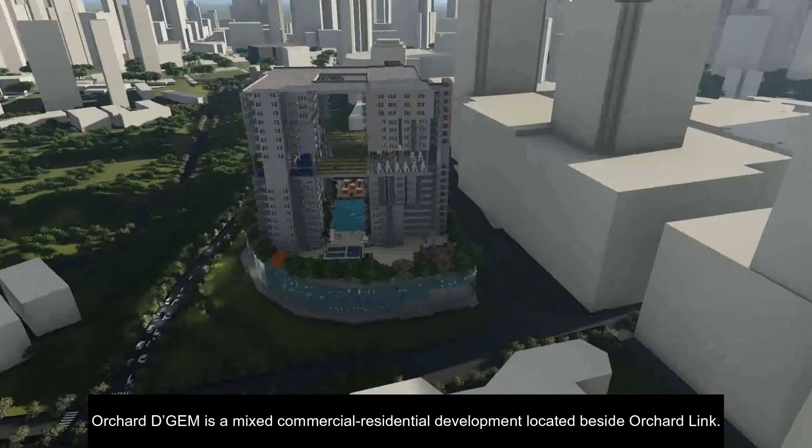Orchard D'GEM is a mixed commercial residential development located beside Orchard Link. The mall consists of 3 levels and 2 basements with 79 retail and F&B outlets.

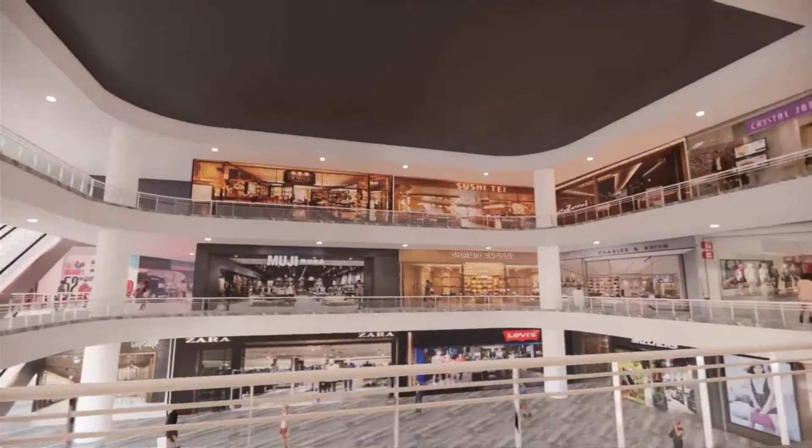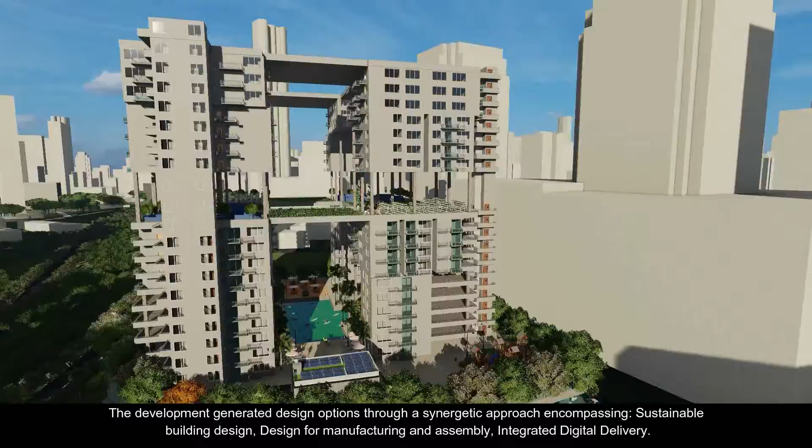The condominium, which is above the mall, has 4 18-story towers with 68 residential units, including a sky aquaponics for community use. The development generated design options through a synergetic approach encompassing sustainable building design, design for manufacturing and assembly, and integrated digital delivery. Orchard D'GEM is designed to be green and sustainable.

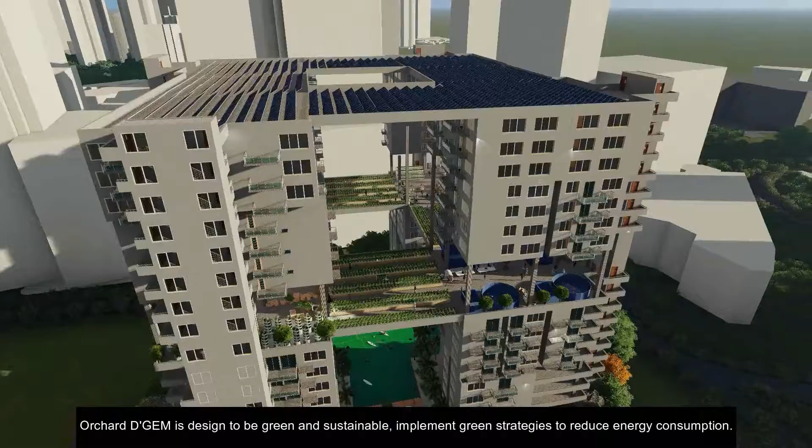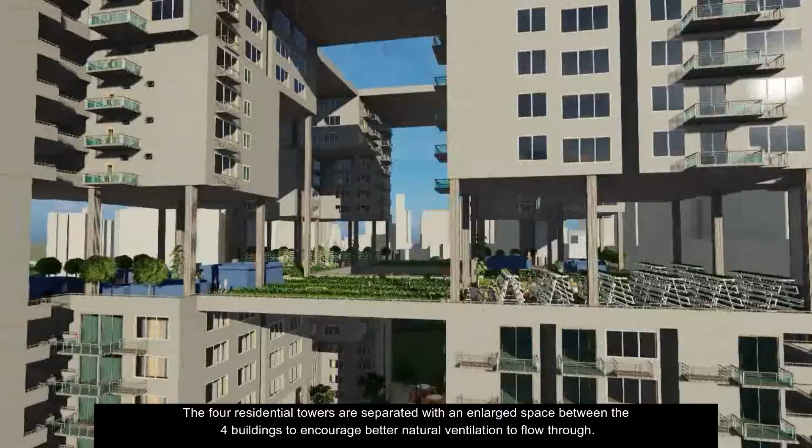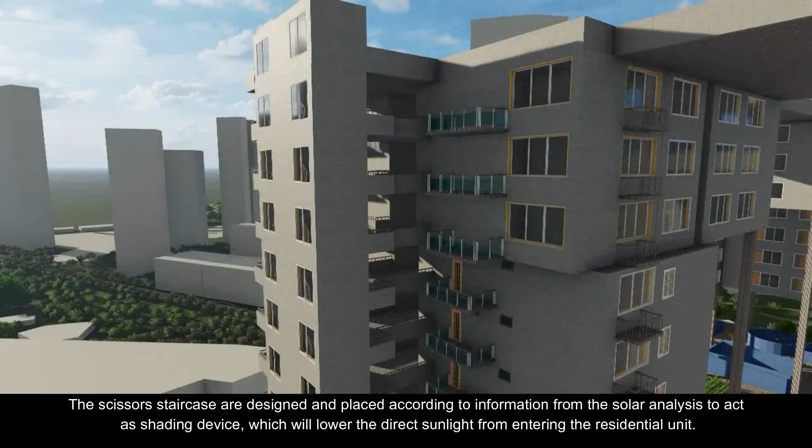The development has a total of 21 stories. The 4 residential towers are separated with an enlarged space between the 4 buildings to encourage better natural ventilation to flow through. The scissor staircases are designed and placed according to information from the solar analysis to act as shading devices, which will lower the direct sunlight from entering the residential units.

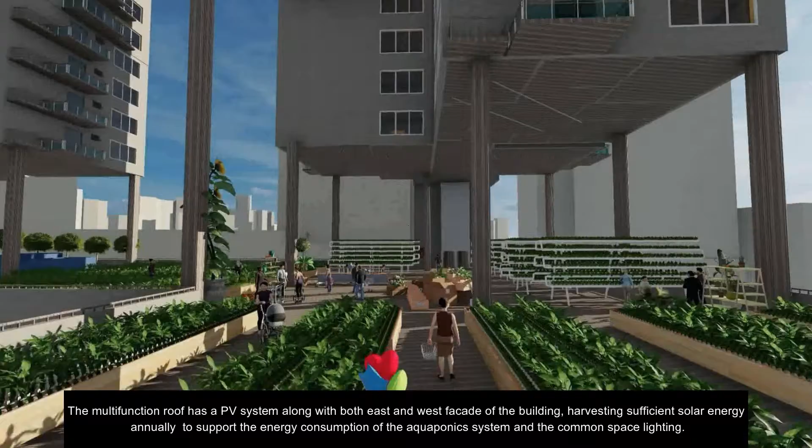The multifunction roof has a PV system along with both the east and west facades of the building, harvesting sufficient solar energy annually to support the energy consumption of the aquaponics system and the common space lighting. The multifunctional roof also consists of a rainwater harvesting system. The water is used for landscape irrigation and general cleaning of the building.

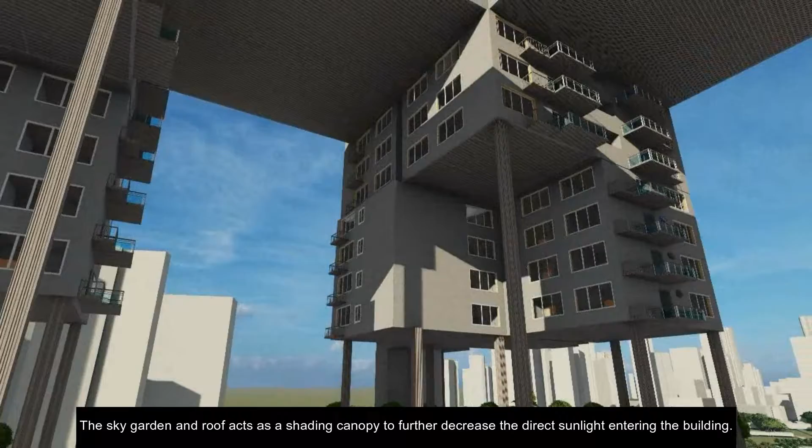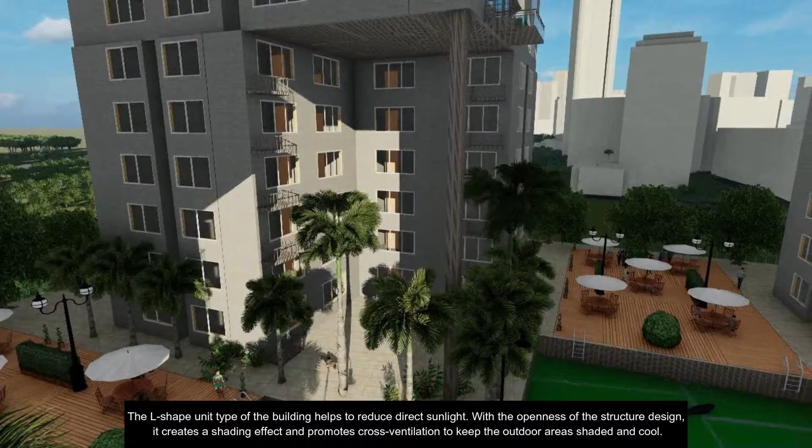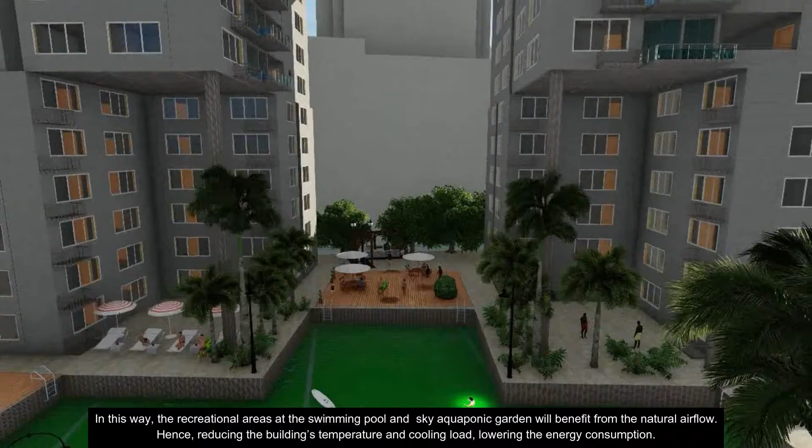The sky garden and roof act as a shading canopy to further decrease the direct sunlight entering the building. The L-shaped unit type of the building helps to reduce direct sunlight. With the openness of the structure design, it creates a shading effect and promotes cross-ventilation, keeping the outdoor areas shaded and cool. In this way, the recreational areas at the swimming pool and sky aquaponic garden will benefit from the natural airflow, hence reducing the building's temperature and cooling load, lowering the energy consumption.

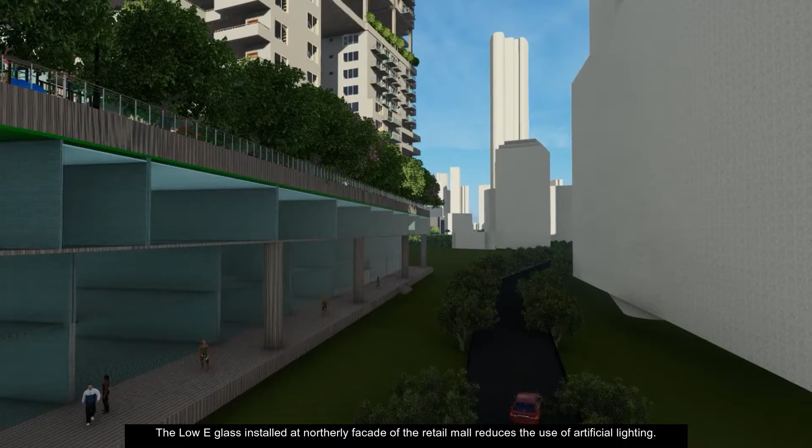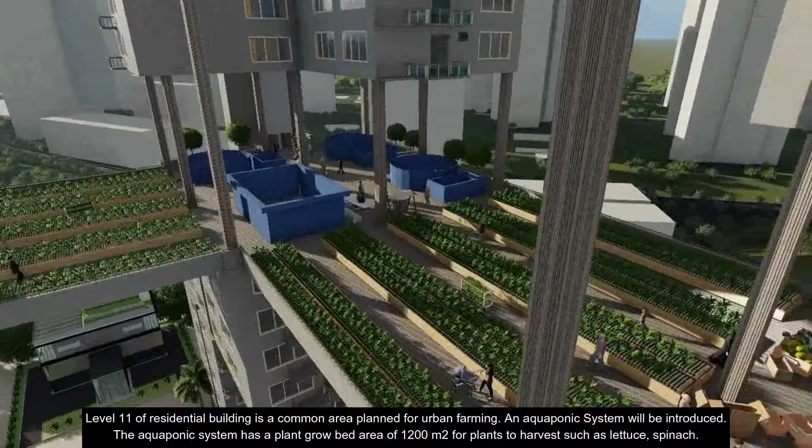The low-E glass installed at the northerly facade of the retail mall reduces the use of artificial lighting. Level 11 of the residential building is a common area planned for urban farming. An aquaponic system will be introduced. The aquaponic system has a growth bed area of 1,200 square meters for plants to harvest, such as lettuce and spinach, and 6 fish tanks with 6,028 kilograms of fish, such as tilapia.

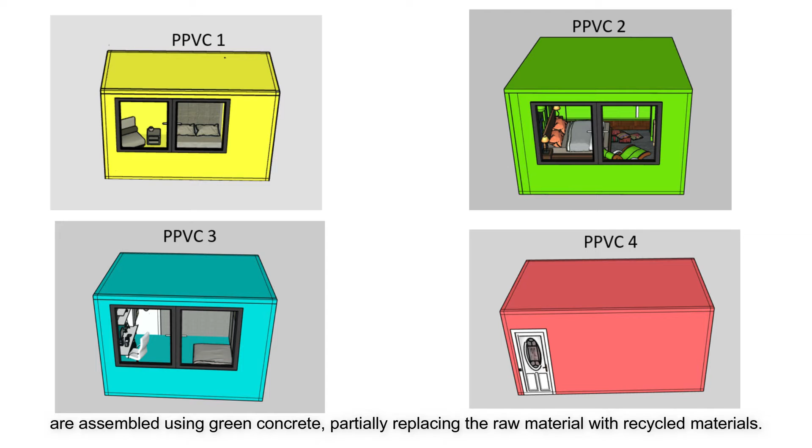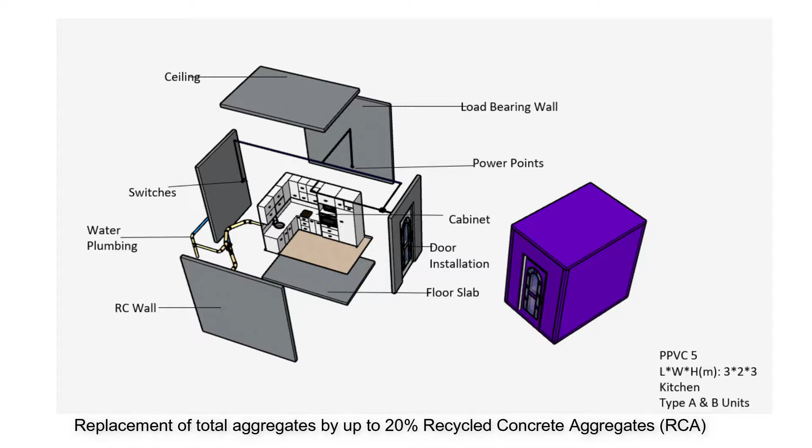Reinforced concrete PPVC modules are used to form the residential units, where the modules are assembled using green concrete, partially replacing the raw material with recycled materials: replacement of sand by up to 10% washed copper slag, replacement of total aggregates by up to 20% recycled concrete aggregates, and replacement of cement by up to 20% granulated blast furnace slag.

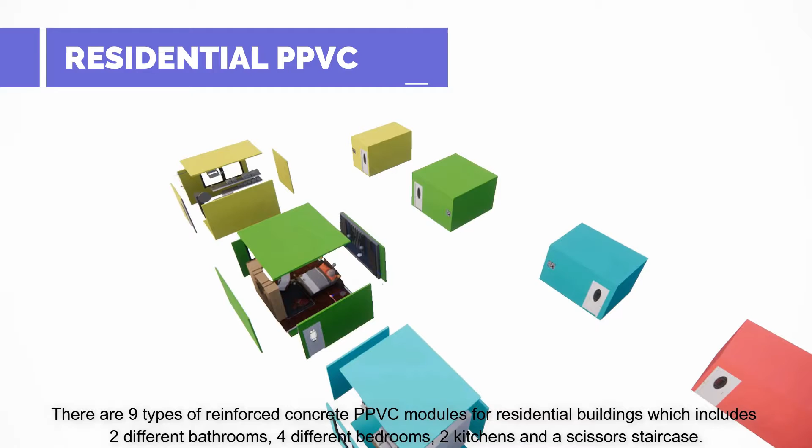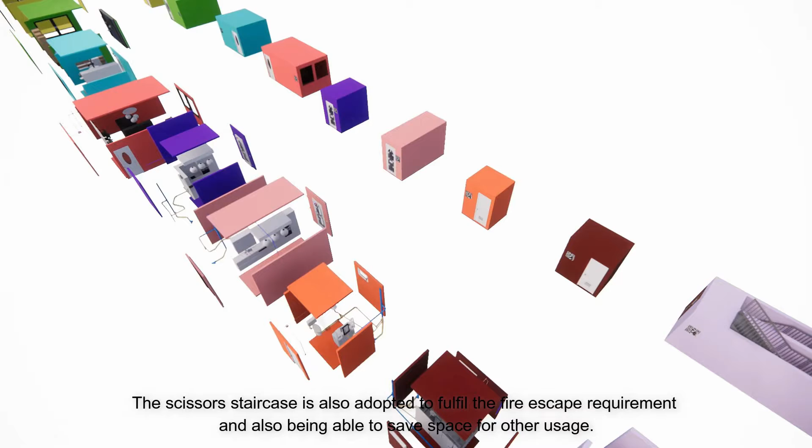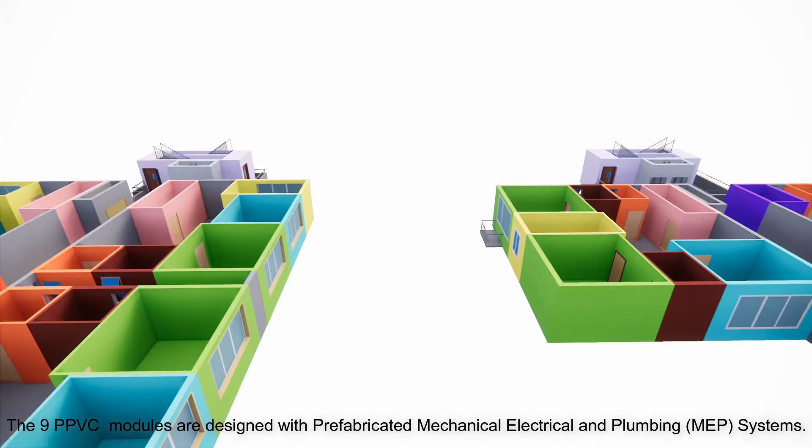There are 9 types of reinforced concrete PPVC modules for residential buildings, which include 2 different bathrooms, 4 different bedrooms, 2 kitchens, and a scissor staircase. The scissor staircase is also adopted to fulfill the fire escape requirement while saving space for other usage. The 9 PPVC modules are designed with prefabricated mechanical, electrical, and plumbing systems. These modules can be mixed in different units, making them flexible.

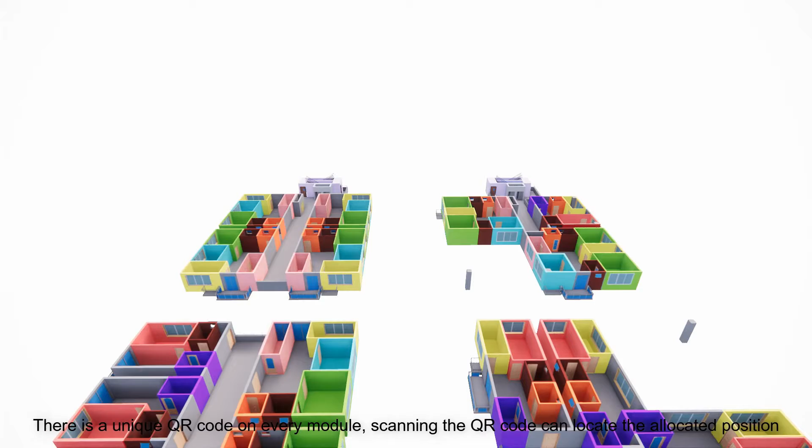There is a unique QR code on every module. Scanning the QR code can locate the allocated position of the module. This can help to improve the efficiency of the construction.

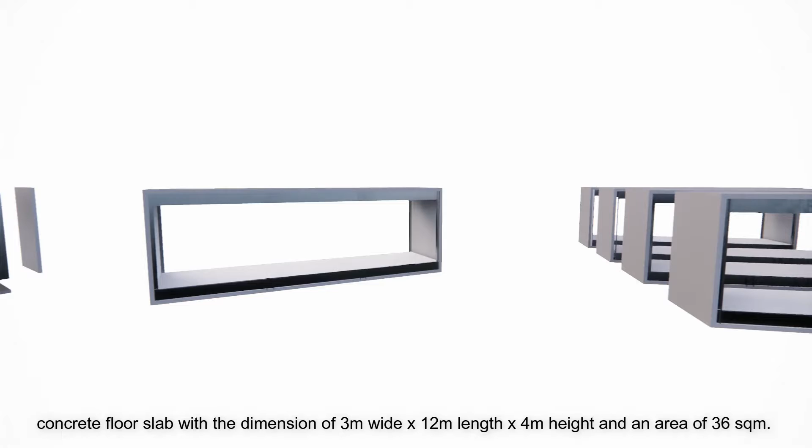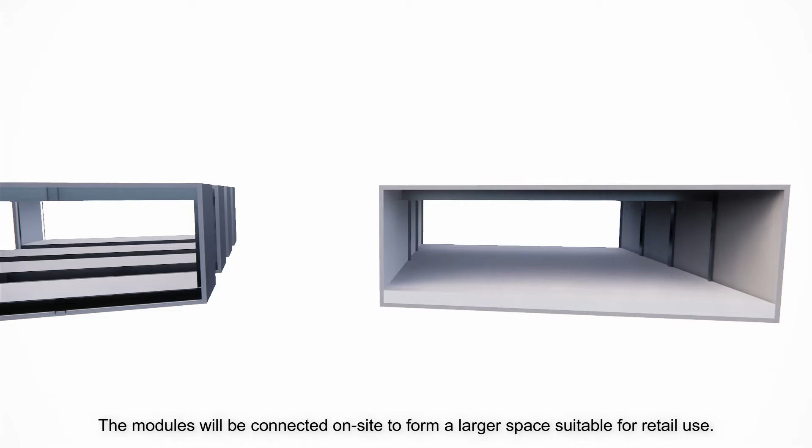The steel PPVC module is formed with a recycled steel frame with lightweight fire-resistant walls and a concrete floor slab, with dimensions of 3 meters wide by 12 meters long by 4 meters high and an area of 36 square meters. The modules will be connected on site to form a larger space suitable for retail use. It has the flexibility to form different sizes of shops depending on the customer's requirement. For example, commercial shops with areas of 144, 180, 216, and 252 are formed by combining these PPVC modules.

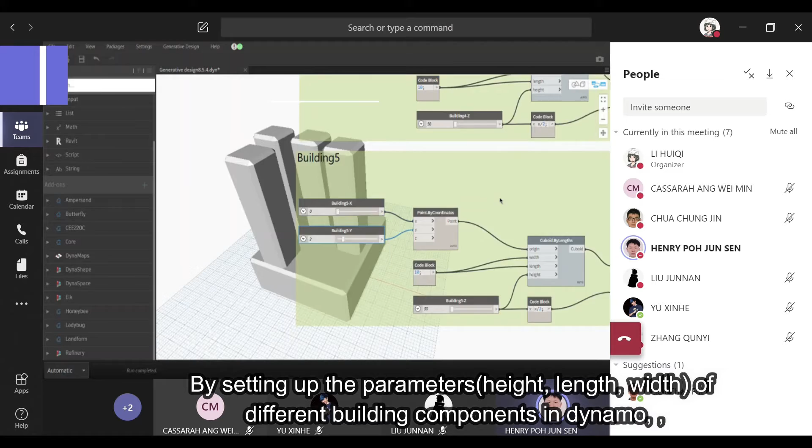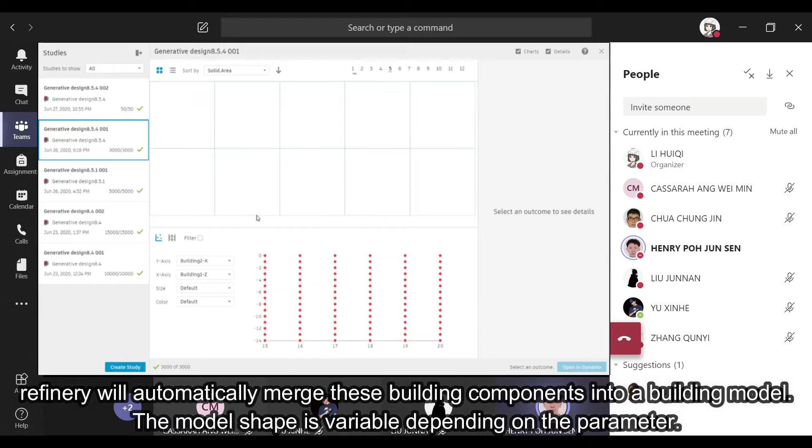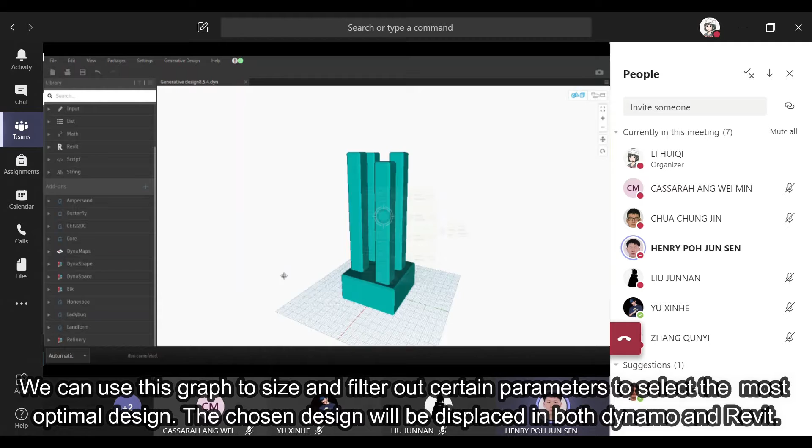By setting up the parameters height, length, and width of different building components in Dynamo, Refinery will automatically merge these building components into a building model. The model shape is variable depending on the parameters. The range and step of the parameters will determine the number of solutions that can be generated. After the solutions are successfully generated, a parallel coordinate graph will be formed. We can use this graph to sort and filter certain parameters to select the most optimal design. The chosen design will be displayed in both Dynamo and Revit.

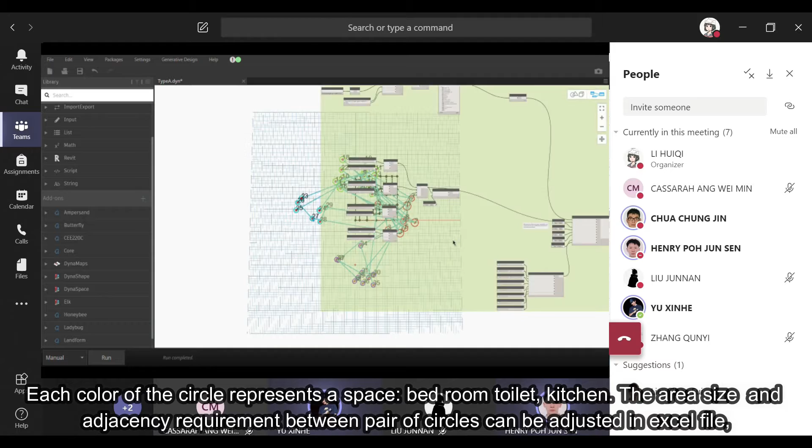DynaSpace borrows ideas from bubble diagrams and combines them with geometric constraint solving algorithms to enforce and optimize for the requirements. Each color of circle represents a space: bedroom, toilet, kitchen. The area size and adjacency requirements between pairs of circles can be adjusted in an Excel file. We can drag these bubbles around to achieve a suitable floor plan design as a reference for further implementation.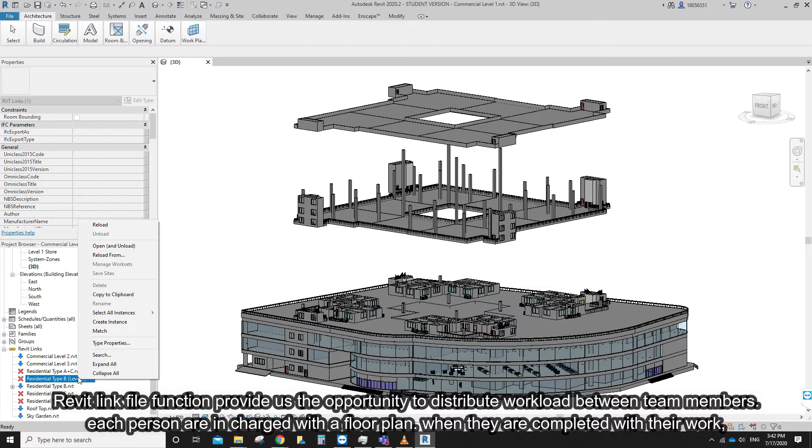The Revit link file function provides us the opportunity to distribute workload between team members. Each person is in charge of a floor plan. When they complete their work, we load them into a base project file to form the final model and check for architectural design flaws. The rectified work can simply be reloaded into the model file to see the changes.

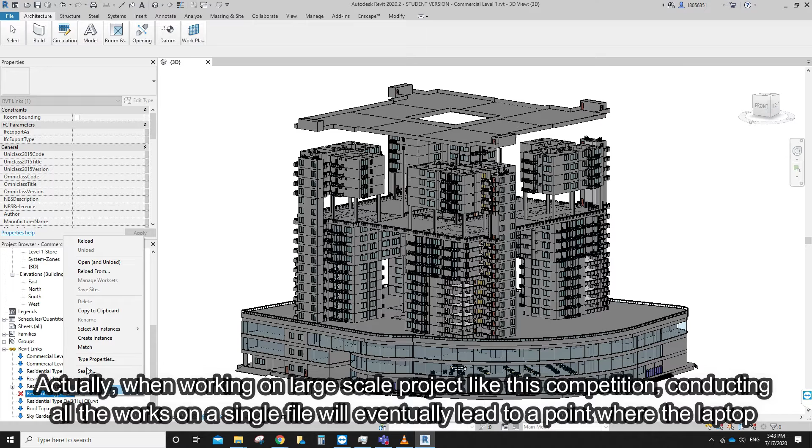Actually, when working on large-scale projects like this competition, conducting all our work on a single file will eventually lead to a point where the laptop becomes very slow and unresponsive, decreasing our work efficiency. Hence, linking the files into a base model can help us to overcome the issue.

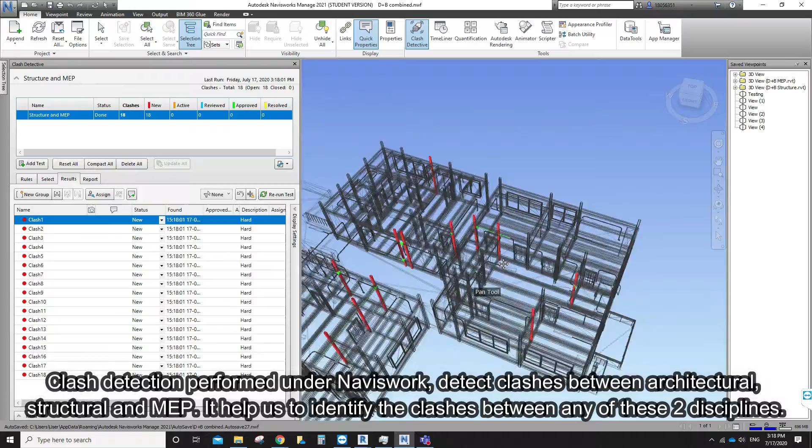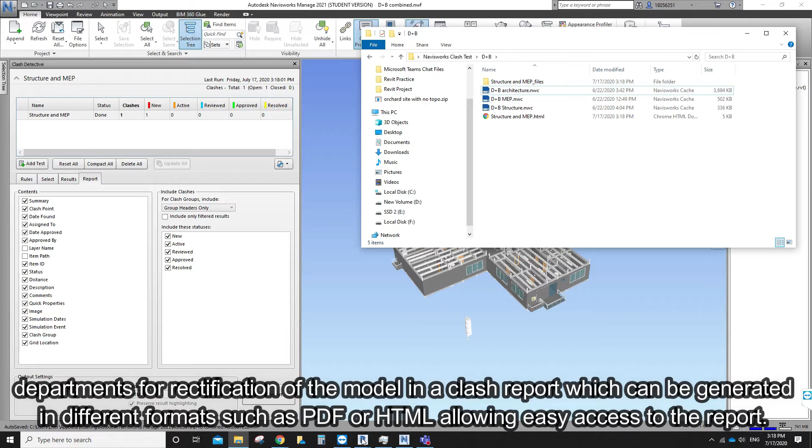Clash detection performed in Navisworks detects clashes between architecture, structural, and MEP. It helps us to identify the clashes between any two of these disciplines. Reports are generated to determine the characteristics of the clash. We can consolidate similar clashes into a single group and assign the clash to the relevant departments for rectification of the model in a clash report, which can be generated in different formats, such as PDF or HTML, allowing easy access to the report.

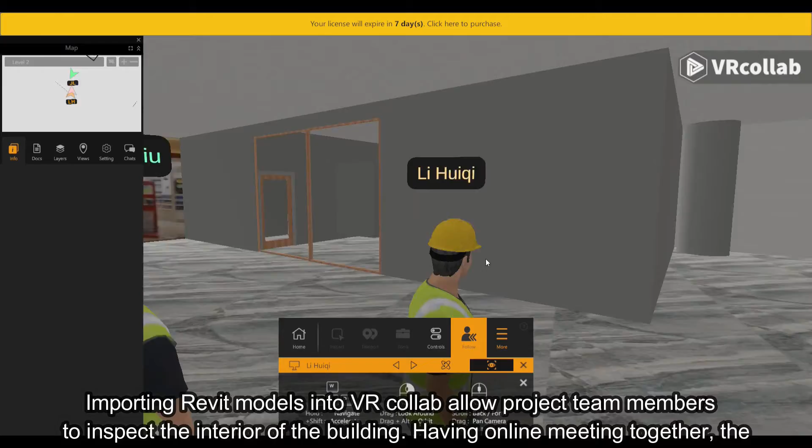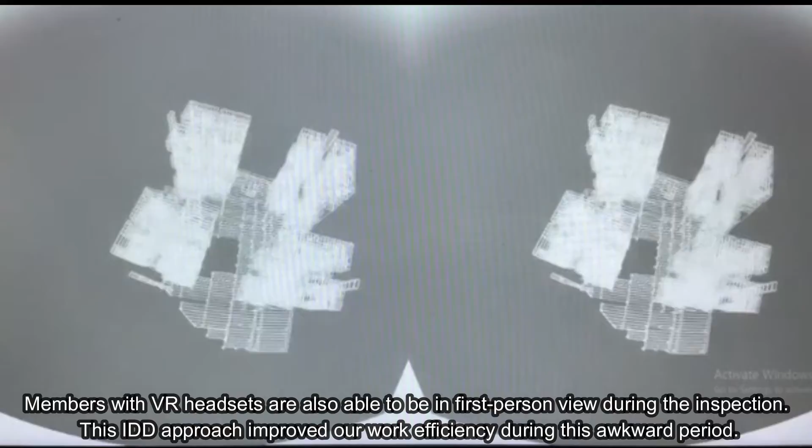Importing Revit models into VR Collab allows project team members to inspect the interior of the building. Having online meetings together, the team members can interact, make measurements, point out design flaws, and take down notes in the process. Members with VR headsets are also able to be in first-person view during the inspection. This IDD approach improves our work efficiency during this awkward period.

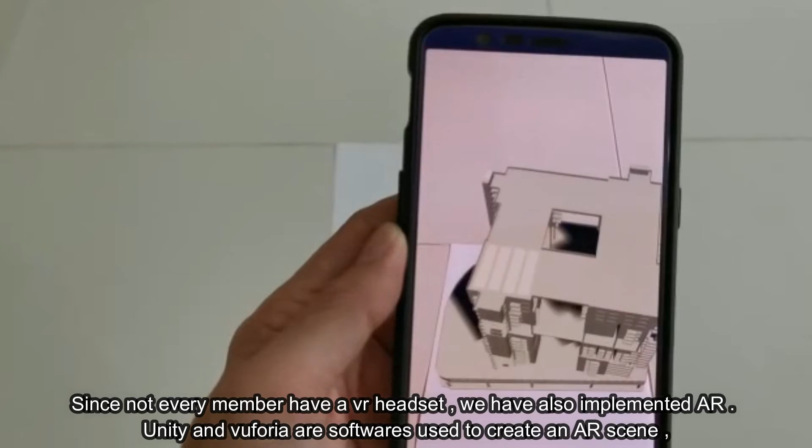Since not every member has a VR headset, we have also implemented AR. Unity and Vuforia are the software used to create an AR scene. With a Unity app installed on a phone, we can simply print out the model on a piece of paper, and the app allows us to visualize the 3D view of the project by scanning the paper.

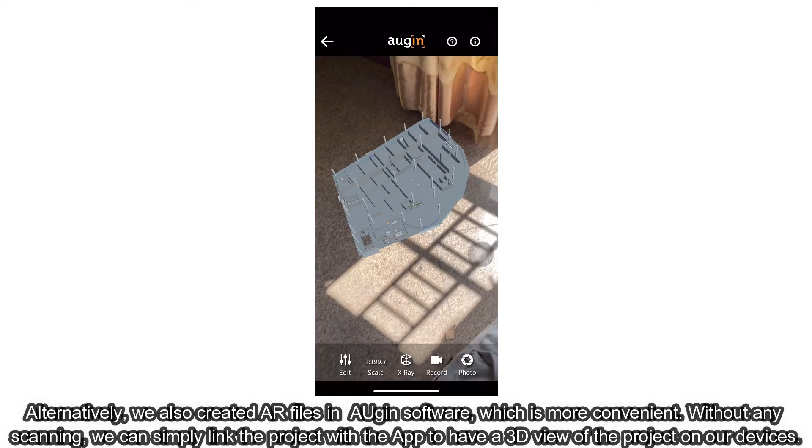Alternatively, we also created AR files in AUgin software, which is more convenient. Without any scanning, we can simply link the project with the app to have a 3D view of the project on our devices.